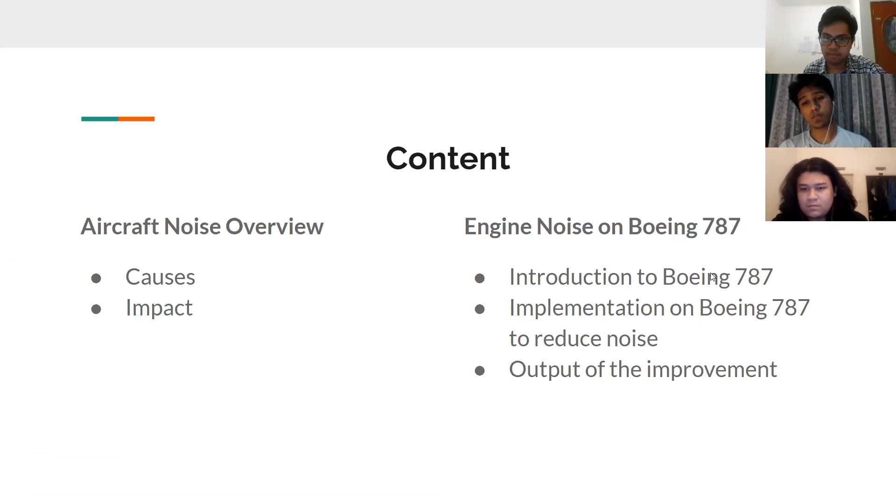First is about aircraft noise. So, aircraft noise pollution is harmful noise produced by aircraft in flight. The sound production is divided into three categories. First one is from the airframe, the structure of the aircraft, from the airflow around the surface of the aircraft, especially when flying low at high speed. And then the second one is from engine noise, the rotation of engine parts, such as fan blades when reaching supersonic speeds.

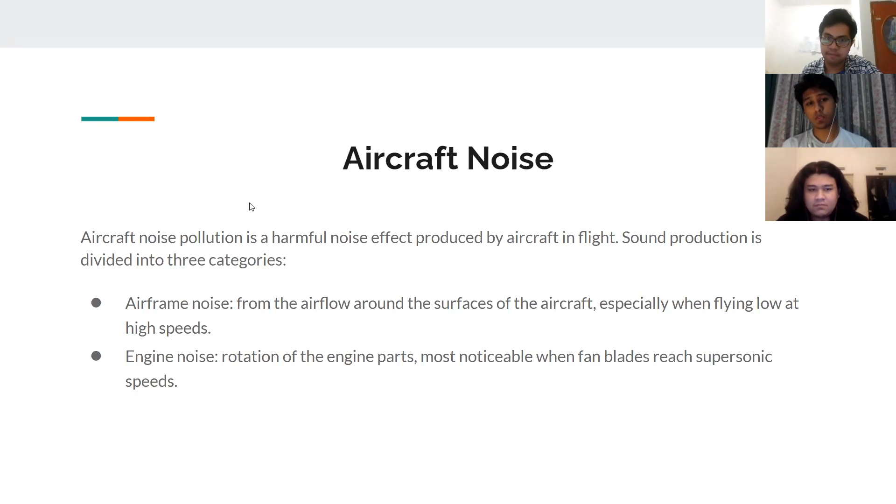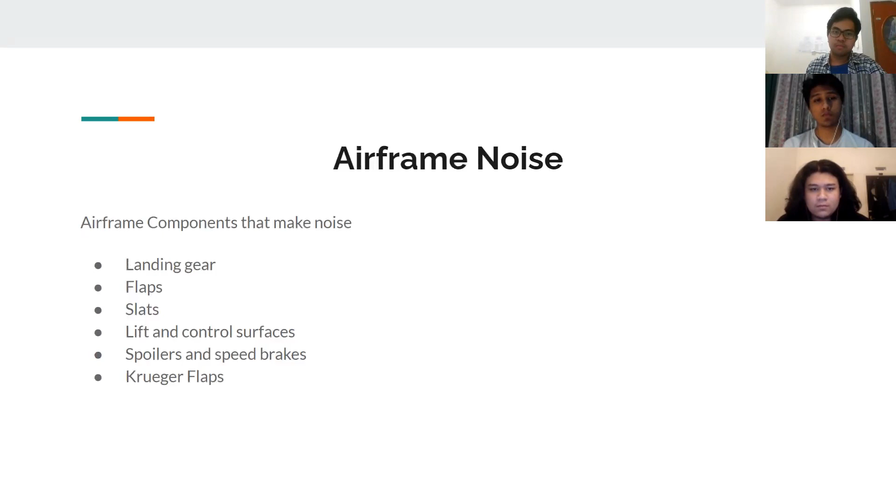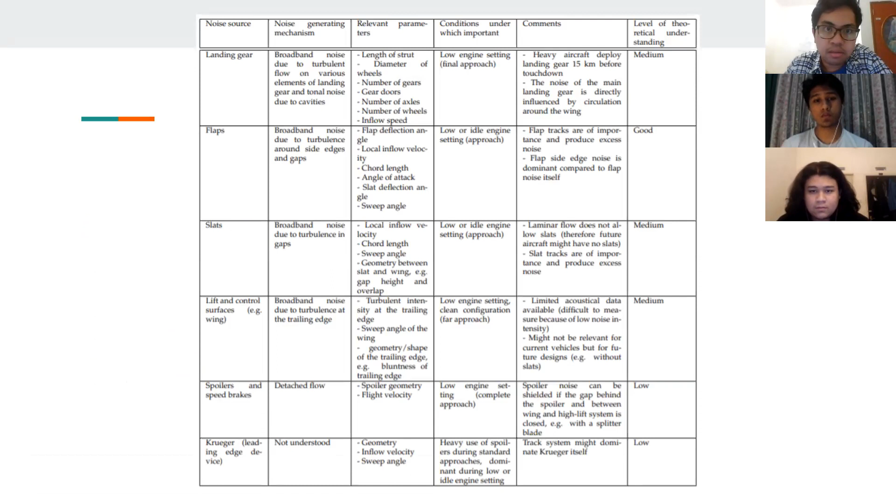This one is airframe noise. There are some components that make airframe noise, such as landing gear, flaps, slats, lift and control surfaces, spoilers and speed brakes, and then Krueger flaps. This one is the summary of airframe noise: the source, generating mechanism, parameters, conditions, and then the theoretical understanding. This table is referred from a journal.

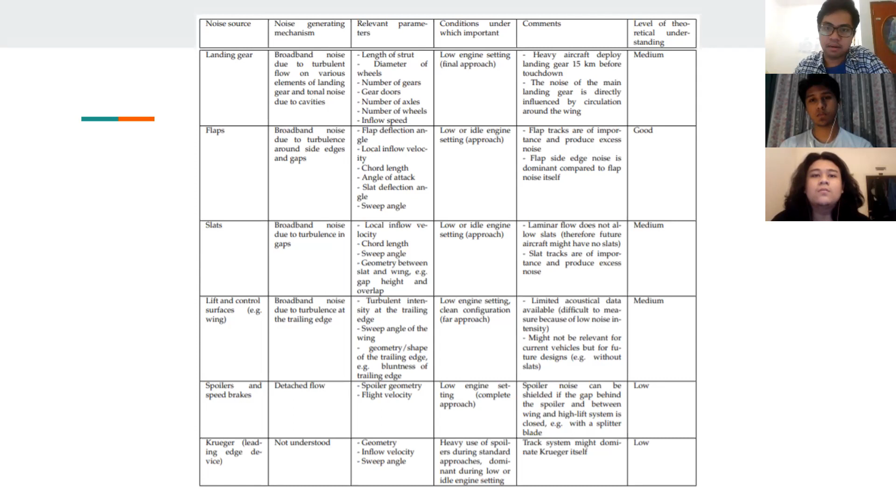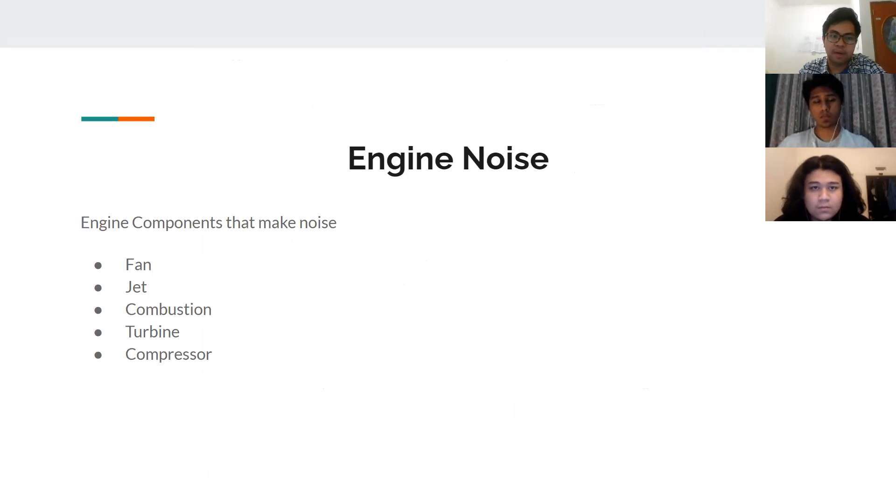And then engine noise. There are some components such as fan, jet, combustion, turbine, and compressor. And then this one is the summary of engine noise: the source, generating mechanism, parameters, condition, and theoretical understanding. This table is also referred from a journal.

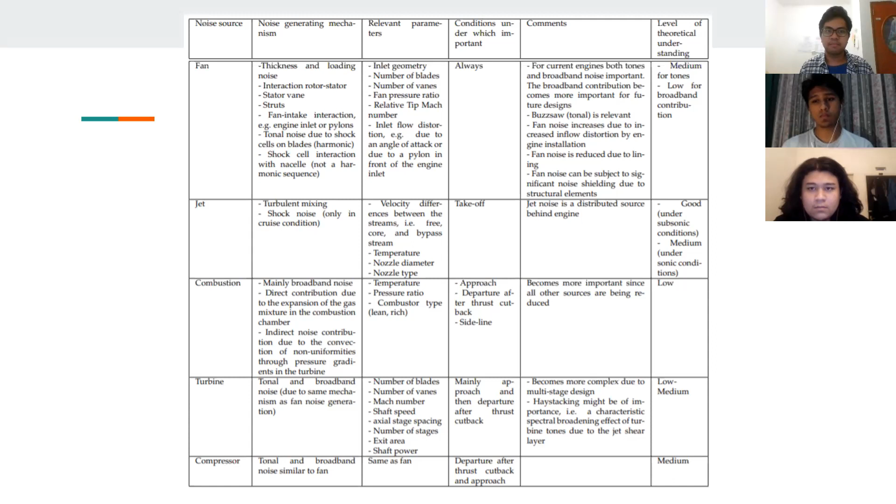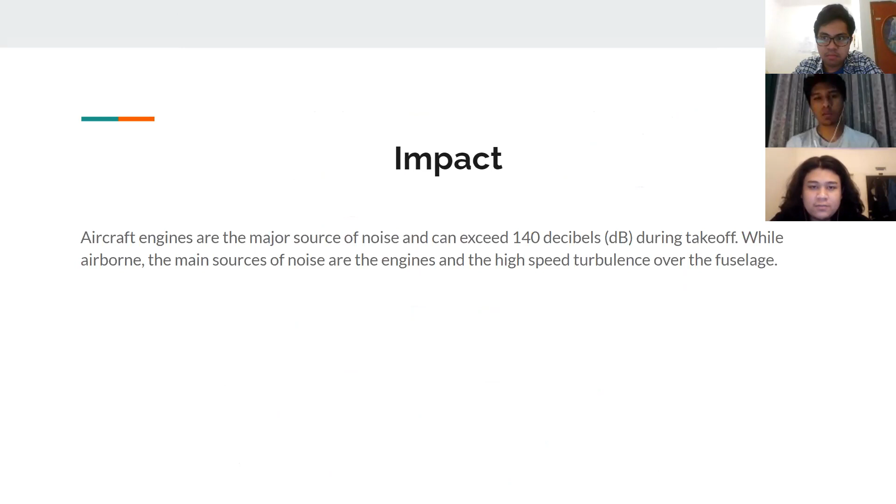So next is the impact of engine noise. Aircraft engines are the major source of noise and can exceed 140 decibels during takeoff. While airborne, the main sources of noise are the engines and the high speed turbulence over the fuselage. So there are health consequences of elevated sound levels coming from an airplane. Elevated workplace or other noise can cause hearing impairment, hypertension, ischemic heart disease, annoyance, sleep disturbance, and decreased school performance. Elevated noise levels can also create stress, increase workplace accident rates, and stimulate aggression and other antisocial behaviors.

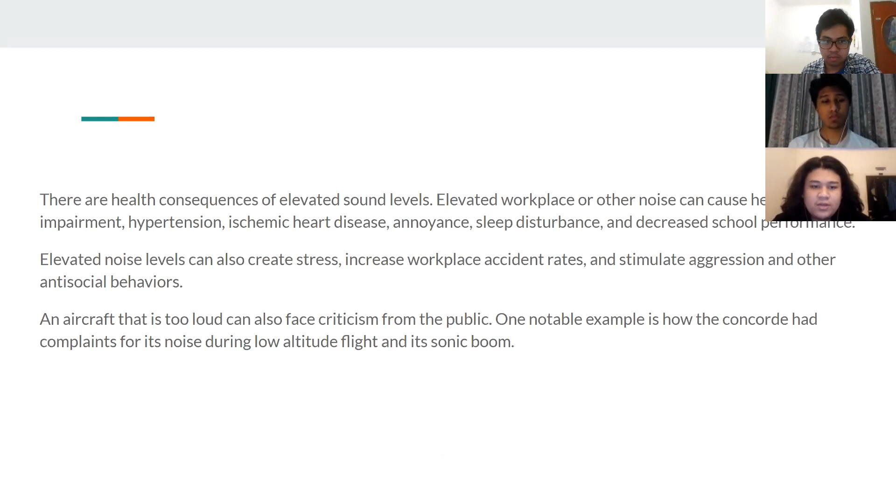So the Boeing 787 Dreamliner is a long-haul, wide-body, twin-engine jetliner, which features lightweight construction. The aircraft is 80% composite by volume, and Boeing lists its materials by weight as 50% composite, 20% aluminum, 15% titanium, 10% steel, and 5% others. Aluminum has been used throughout the wing and tail leading edges. Titanium is predominantly present within the elements of the engines and fasteners, while various individual components are composed of steel.

Okay, so the next one is the problems on reducing noise. Engines can be made quieter by the simple solution of adding a muffler. A muffler, or sometimes we call it a silencer, works briefly like this: when the sound wave is produced by the engine, the muffler will counter the sound wave, and that counter makes a negative of the sound wave produced by the engine, so the counter sound wave cancels out the sound wave from the engine. That's how the muffler works, and that's why the muffler can reduce the noise coming from the engine. They are available for many models and can be installed at an astronomical cost.

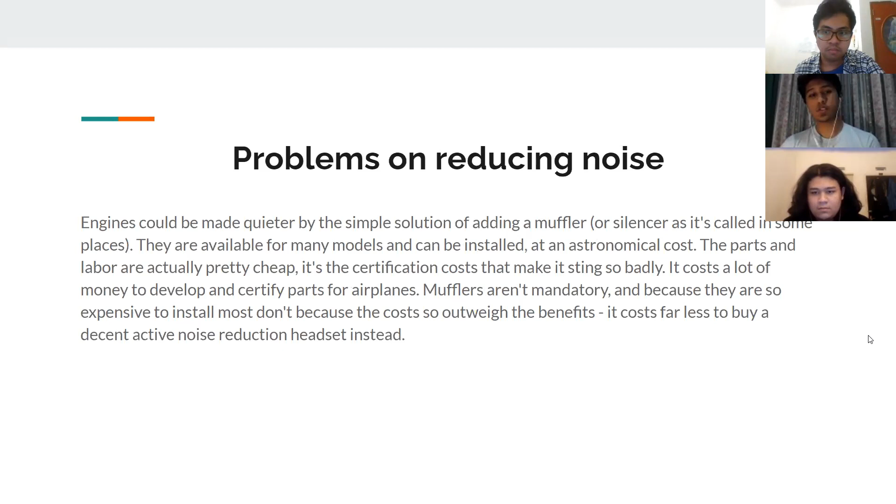These are some implementations that have been going on the Boeing 787. The first one is it uses modern high bypass turbofan engines, which are quieter than older turbojets and low bypass turbofans. The second one, the air inlet contains sound absorbing material, so this could also reduce the sound from the engines. And the third one, the exhaust duct is covered with a chevron tooth pattern on the rim, which combines hot and cold airflow more efficiently to reduce the engine noise.

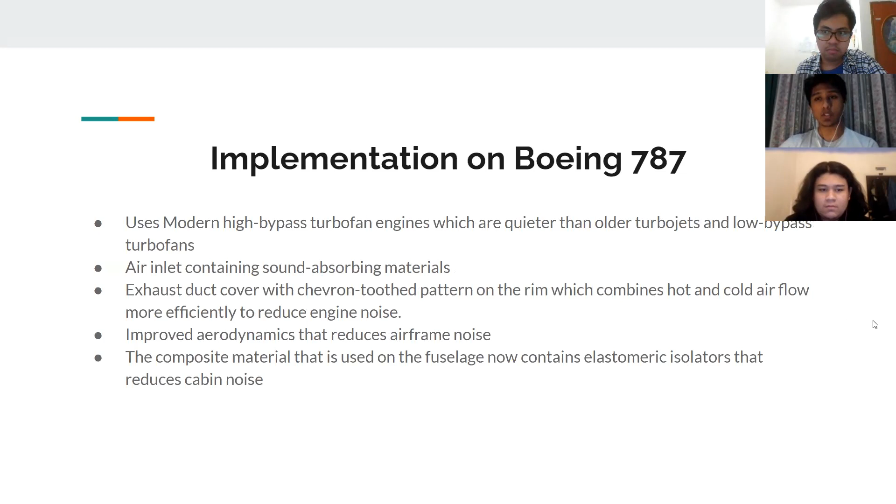And from this presentation, we can summarize the output of the improvement. So the first one, according to Boeing, the 787 prevents sounds above 85 decibels from leaving airport boundaries. Boeing also claims that the noise footprint of the 787 is 60% smaller than those of today's similar sized airplanes. Like what my friends have said, if the sound reaches above 85 decibels, it could damage our hearing and cause hearing loss. So this is why reducing noise is very important.

The second one, a study conducted by London Heathrow Airport has shown that during the first 17 months of its operation, the Boeing 787 is significantly quieter than the 767 and A330. The 787 is on average up to 7 decibels quieter on departure than the 767, and up to 8 decibels quieter than the A330 aircraft. The result also confirmed that the 787 is up to 3 decibels quieter on arrival than the aircraft types it is intended to replace. And the last one, it reduced cabin noise according to the passengers.